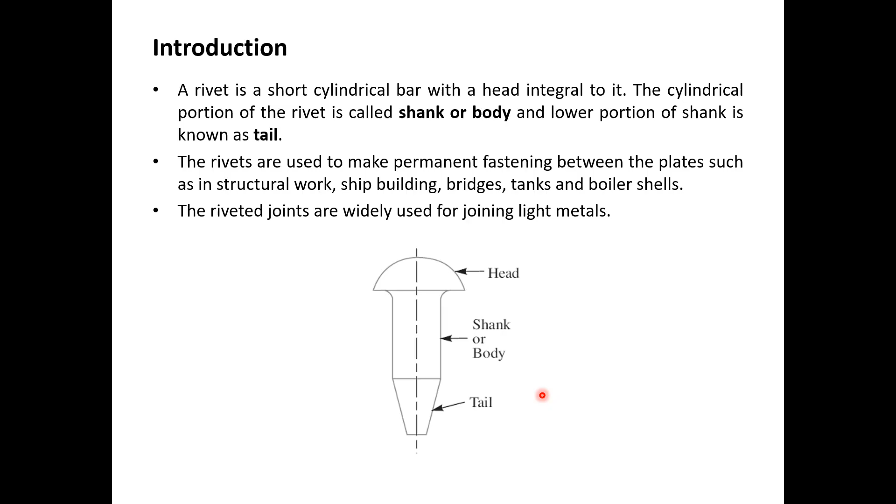Riveting method. How riveting is carried out between the two plates to be joined. So, in the first step, the two plates which are to be joined together are drilled and then separated to remove any chips or burrs between them.

In the next step, the rivet is introduced into the plates and the original rivet head is backed up by a heavy bar as shown in this figure. This is the original rivet head. It is supported by a backing up bar. A die is placed against the tail and blows are applied by a hammer.

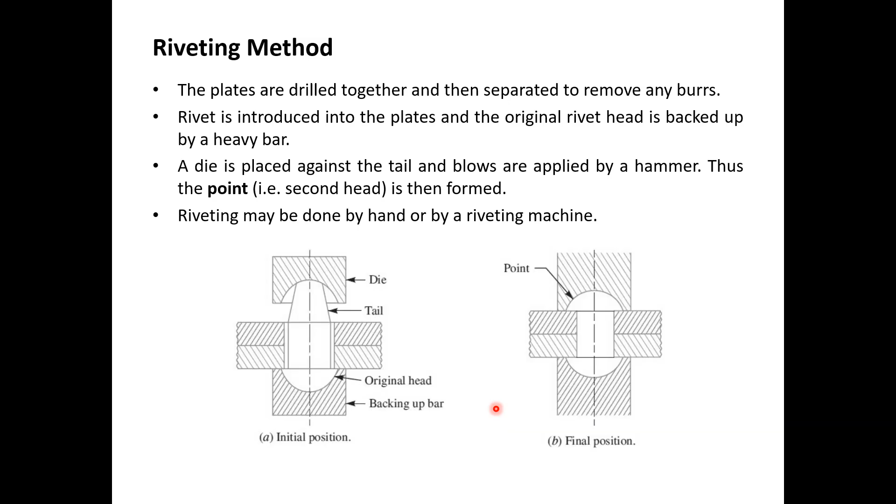Thus, the point, or we can say a second head, is formed as shown in this figure. You can see an identical head is formed onto the other side of the rivet. This was the original head and this one is the new head formed, which is known as point. Riveting may be done manually or by a riveting machine using some pneumatic power source or hydraulic power source. Alright.

Next is types of rivet heads. So this figure shows different types of rivet heads that are practically used in different applications. First one is snap head, then pan head, mushroom head, different categories of countersunk heads, and the last one is flat head.

As I told you that different heads are used in different applications, the snap head is generally used for structural work, and the countersunk heads are mainly used in shipbuilding, where the primary requirement is of flush surfaces or flat surfaces. Among these, the pan head has the maximum strength because of its shape.

Also, the dimensions of different sections of these rivet heads are taken as a particular proportion of the main diameter or the shank diameter, or we can say the body diameter. It is denoted by small d. For example, in case of snap head, the head diameter is taken as 1.6 times the shank diameter, whereas its height is taken as 0.7 times the diameter of shank. Length will depend upon the thickness of plates to be joined. That's why it is denoted by a double arrow.

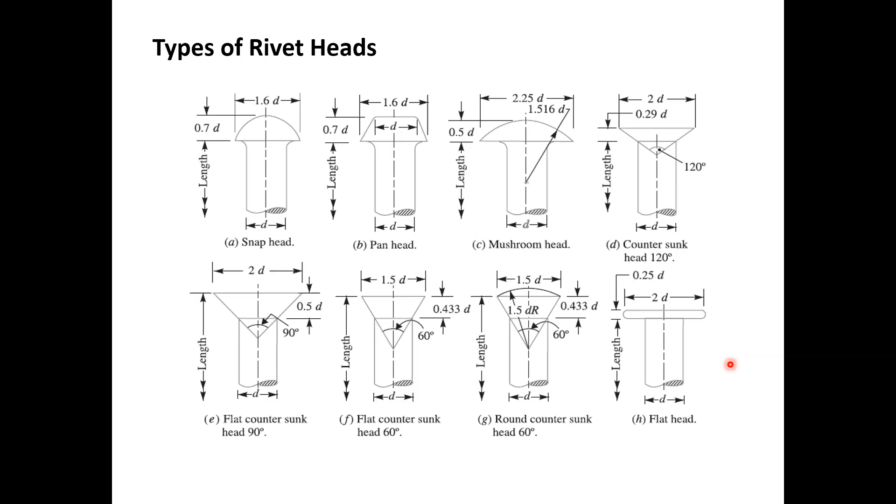And in case of flat head, the diameter of the flat head is taken as 2 times the diameter of the shank, and its thickness is quite small. It is 0.25 times the shank diameter. Types of riveted joints. The riveted joints may be broadly classified as lap joint and butt joint.

Lap joint, as the name suggests, is the one in which one plate overlaps the other plate and the two plates are joined using a rivet. Here you can see the one plate is overlapping the other.

Whereas in case of butt joint, the two plates are in alignment with each other, that is touching or butting each other, and a cover plate is placed either on one side or both sides of the main plates. The cover plate is then riveted together with the main plates.

Here you can see these two plates are aligned, or they are touching each other or butting each other. That's why the name butt joint. The thin plate is known as the strap or cover plate. This may be used only on one side or on both sides, depending upon the strength requirement and size of the structure. And finally, the cover plate is riveted or joined using rivets with the main plates. One rivet is here and one rivet is here.

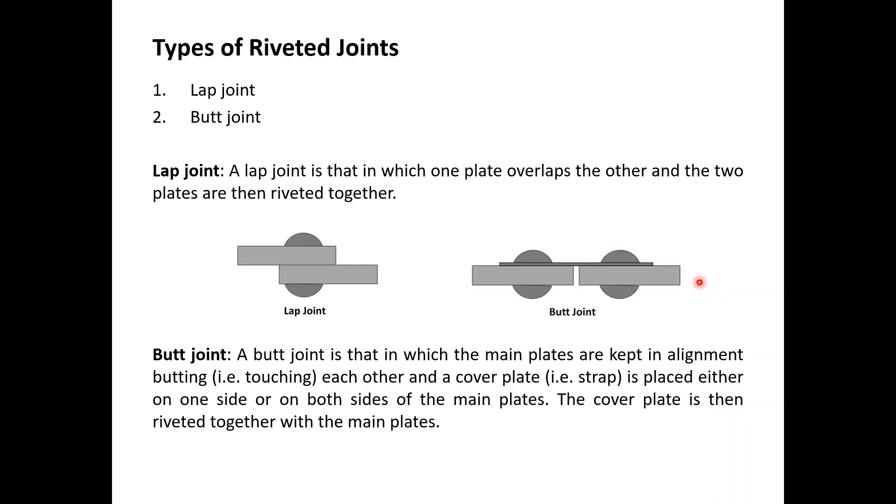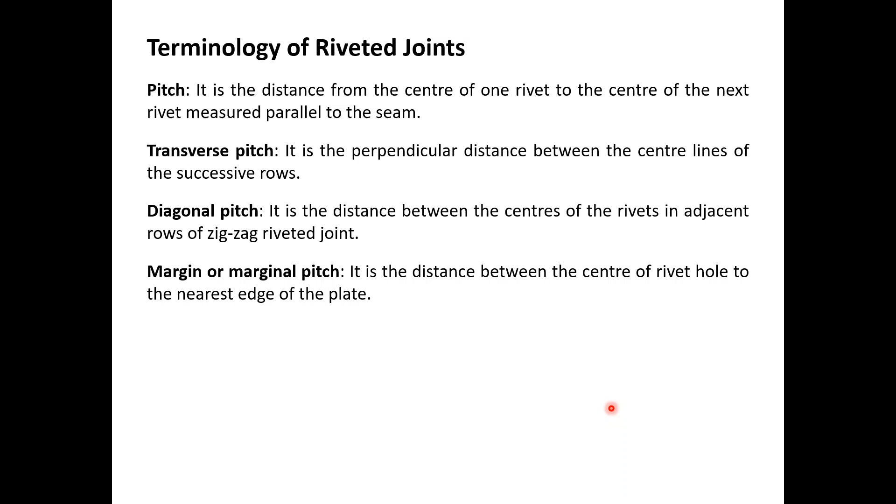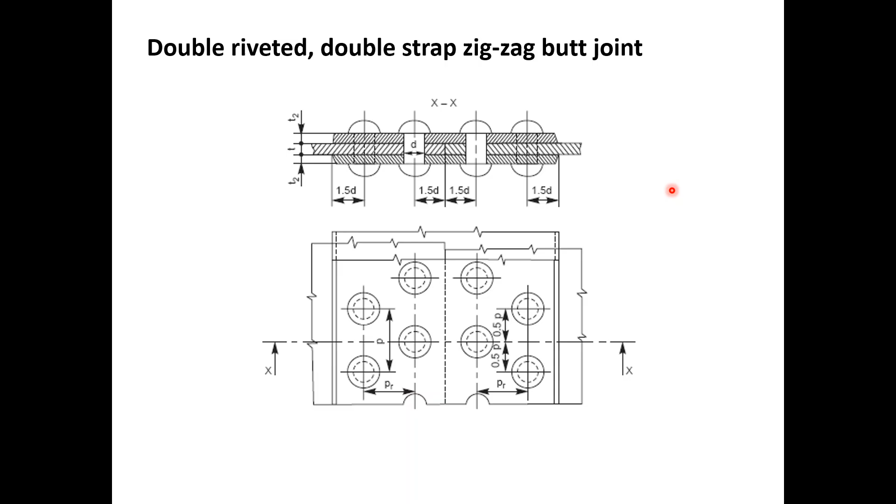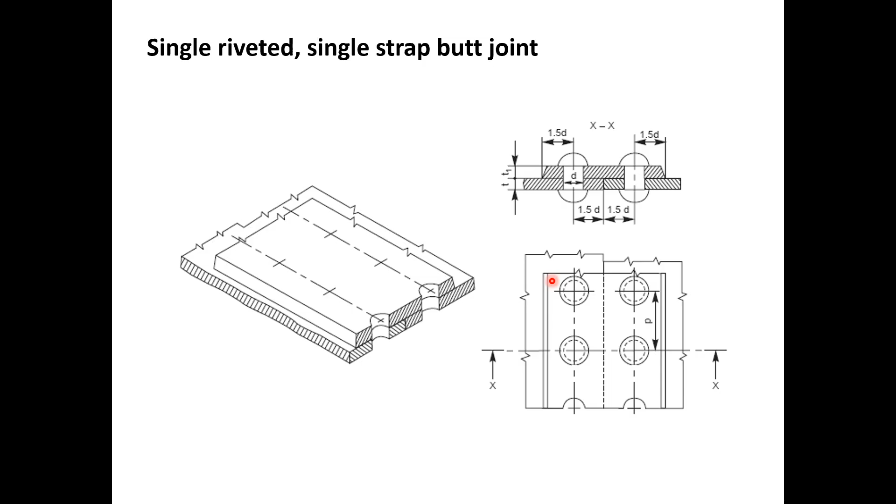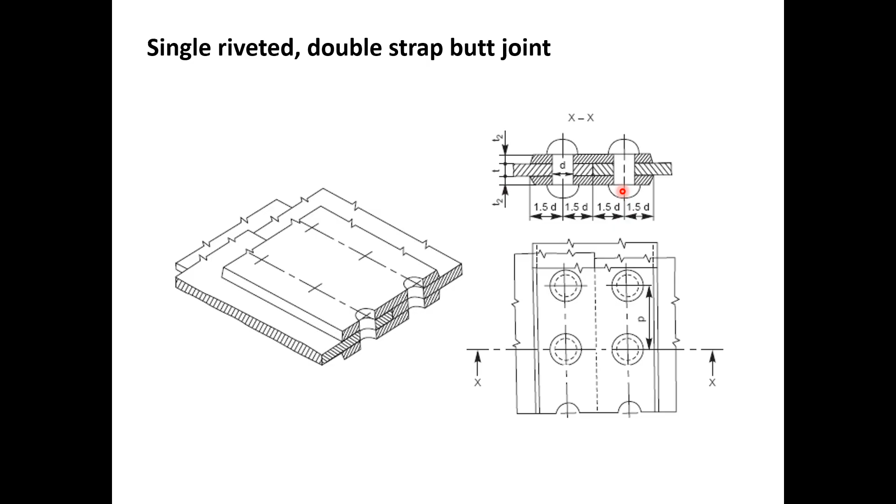And in case of double strap butt joint, there are again two terms. Small t denotes the thickness of main plate, and T1 and T2 are the thickness of cover plates. Depending upon the strength requirement at a particular side, the thickness of cover plates may be different. Like this may be T1 and this may be T2, or both may be T1 or both may be T2. So it depends upon the application or requirement.

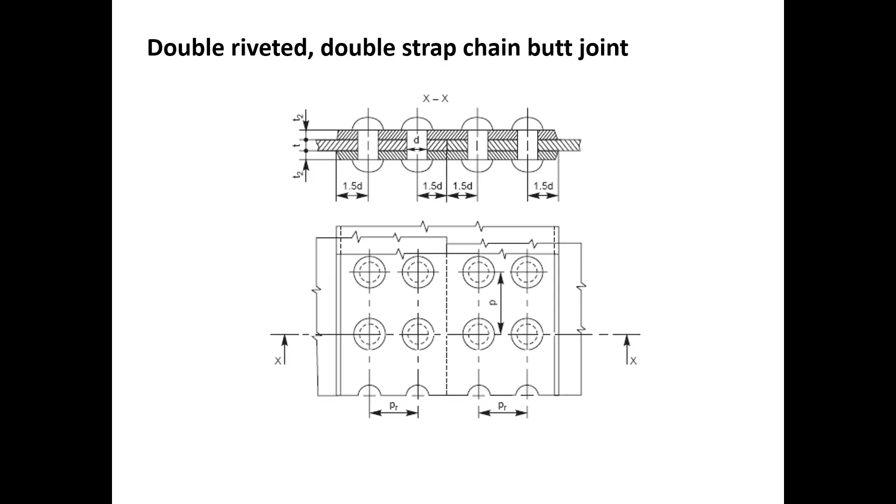One more thing to note here is we have shown XX in all the figures. So XX is basically a plane along which we are cutting a section to draw the elevation view. See, this is the plan view of this structure. So if we cut a section along this plane, the elevation will look like this.

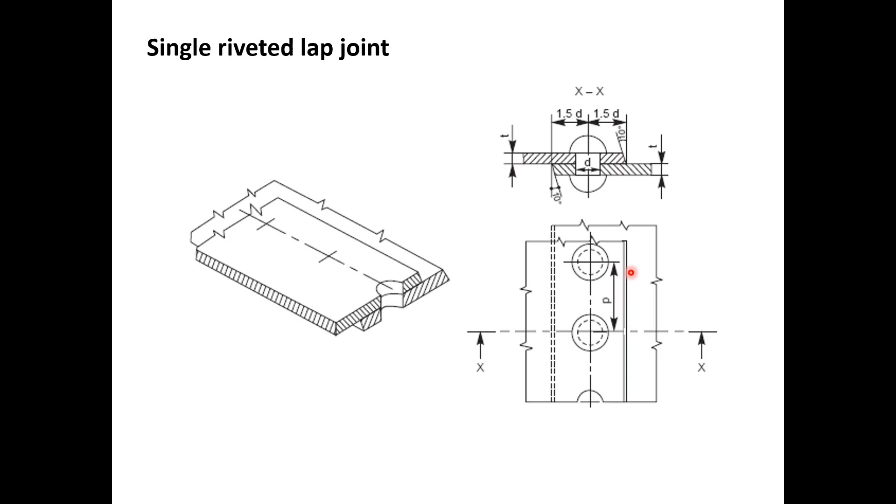In case of single riveted lap joint, all the rivets are hidden behind the first rivet, or we can say the rivet along this section. That's why in the elevation view we will be able to see only one rivet.

Similarly in case of double riveted joints, when we cut a section along this plane, there will be two rivets visible, one corresponding to this one and the second corresponding to this one, and we will not be able to view these rivets because they are hidden behind these sectional rivets. All right.

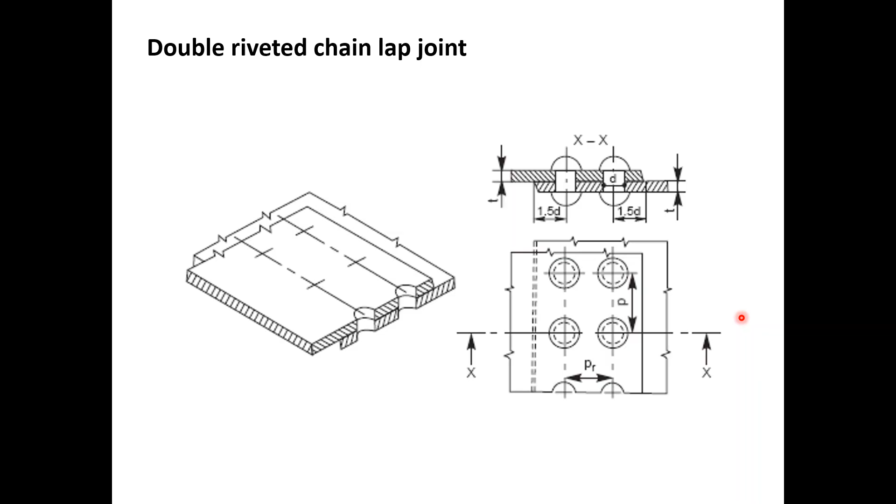In case of chain riveted joint, if we cut a section along this plane, this rivet will be shown by bold lines, but because this rivet is somewhat offset from this plane, this portion is still hidden. That's why we have shown it using dotted lines.

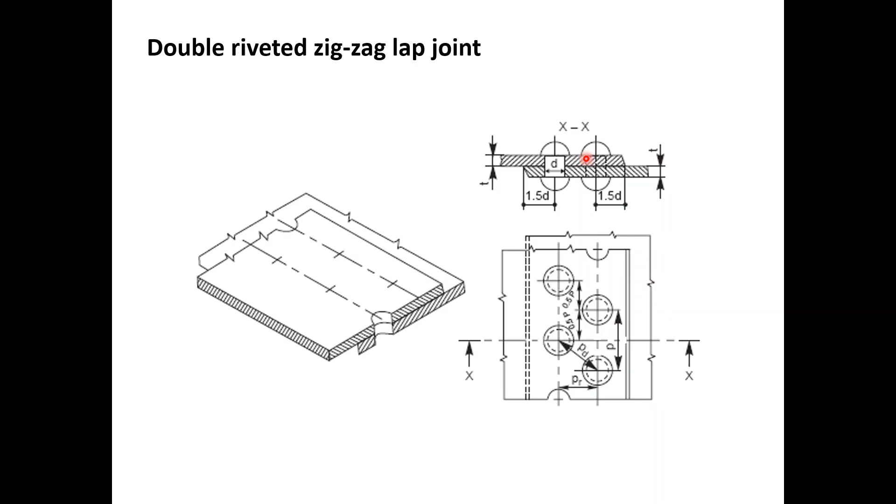So this is all about the rivets, introduction, types of rivets, riveting method, different configurations of riveted joints or riveting. So now I'm open to questions. Please go ahead.